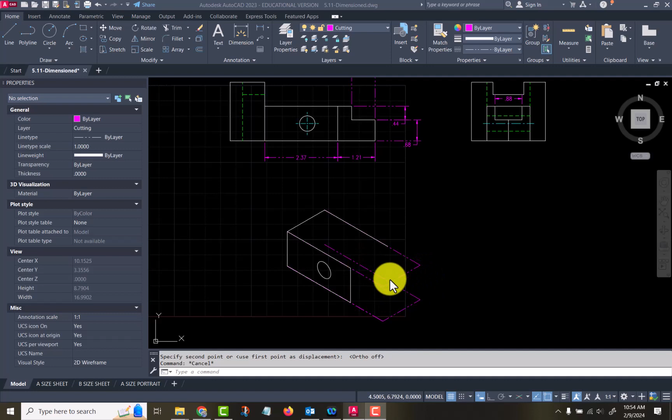And so what I've got drawn here is just the end of the safety key. I've got my construction lines here. I've put them on a different layer, made them purple, to make them easier for you to see on the video. But I've got the length of it and the width of it and the height drawn out here. And because this thing has a pointed end, and we know it's in the center because we could look at it here and measure here.

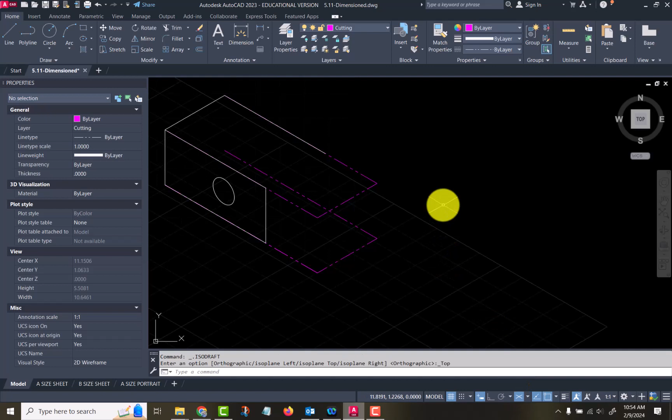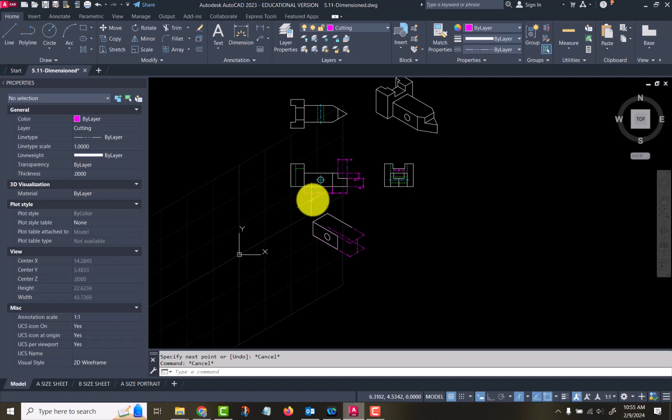So what I want is a center on the end point here that I want to draw. So let me get back into isometric mode. Rotate my axes. There we go. And I'm going to draw a line center, and I'm going to come up to center. Okay, now I know the location of this line here because I can measure it in this view, so it's 2.37. And if I were to use my aligned dimension tool, okay. Now, you could take this line and copy it down 2.37 to give you that location.

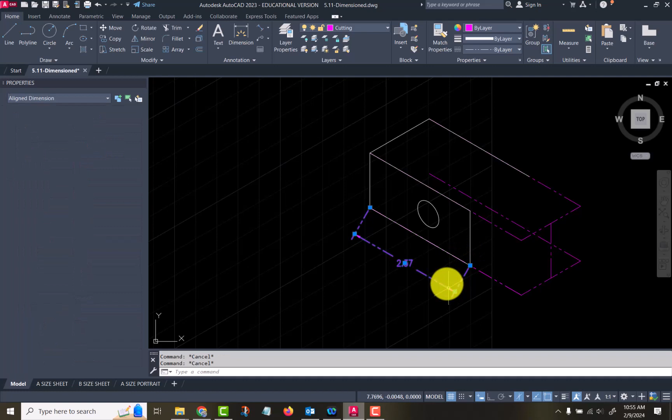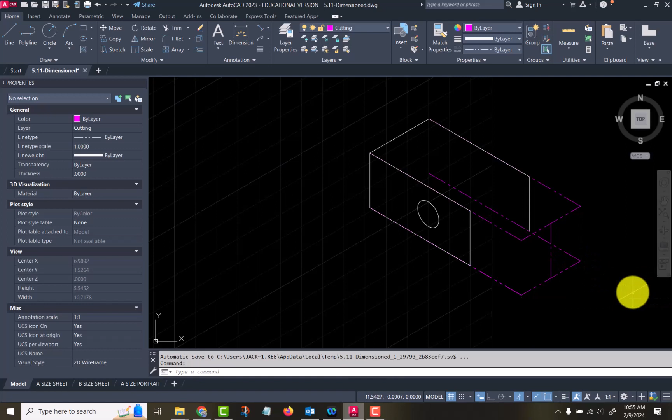Okay, now I can draw this bottom across. I need to know where it goes on the back side there, so let's just copy it over to the back. And so I'll select my line, and I can use this as a base point and go over to there. So that gives me the rear of the object. And I know it's there, okay. Let's see, I don't think I can see the back going across. I could at the top, so I will need it there. So let's go ahead and draw the rear of it at the bottom.

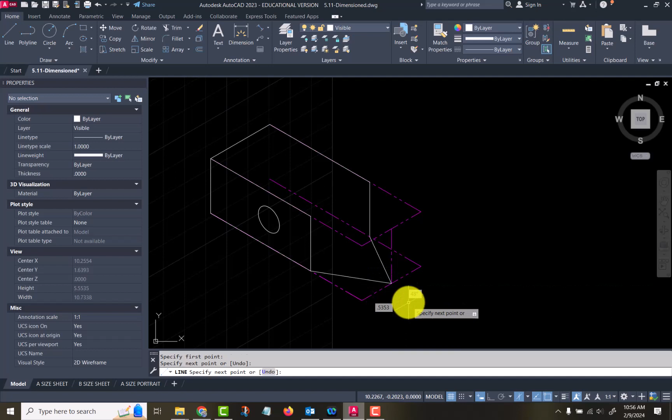So we'll go line again. And you'll notice that I do not have my ortho mode turned on down here because it's not snapping to the 30, 60, the 60-degree angles. Okay, so I've got those two. So let's take these two and copy them up to the top surface. Okay. So that's got the front edge of the thing there.

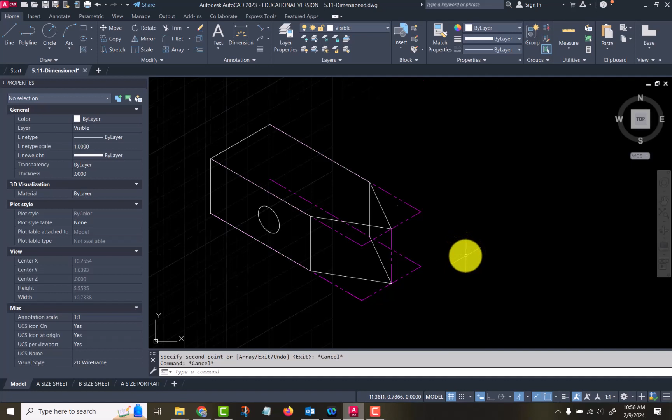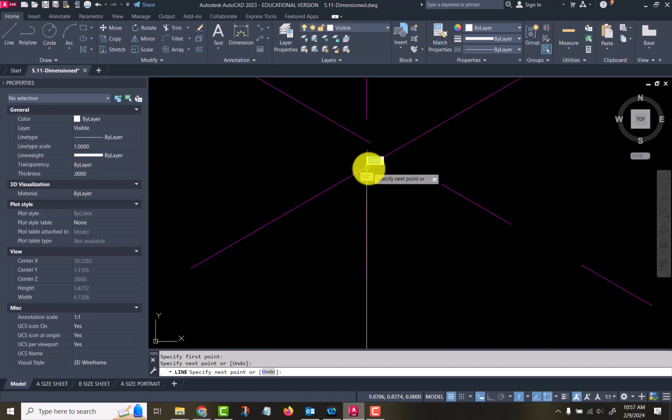Now, I need to know how far back this notch is and how high up it is. So it's 0.68 up. So let's take this line right here and copy it up 0.68. And I'm going to use that as my base point. And I'm going to come up until I get a snap, and I'm going to type in 0.68 on the keyboard. Okay, so that is coming up. You got to watch your object snaps on these, okay? It gets a little confusing. All right, so that's got the front edge of it there.

Now I know that it is 0.76 back. So I'll select that line and I'm going to copy it. I want to come down here for a base point and come back and get a snap going back the right line. And I'm going to tell it 0.76 on the keyboard. Now then, this is confusing. Yeah, I know. But that's how far back it goes, and then it goes up. Now I need to know how wide that thing is. I don't need this line anymore, so I'm going to delete that one to get it out of the way.

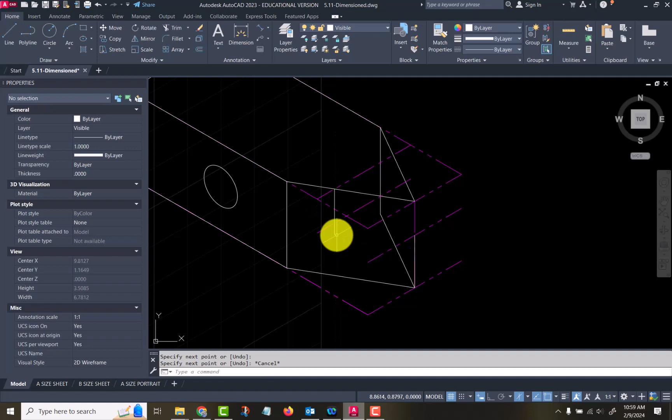And let's see. I don't know if I should copy. Okay, we need the top one here. So that was 0.76 back. So let's copy this one. Get a snap and go 0.76. Okay, so where this crosses the top line, that's where the initial cut comes down. So now I can draw a line from here at that intersection, and I'm going to just draw straight down. I'm going to draw it a little bit long. Okay, and then I can copy that over to the other side, or I could draw it again, either one.

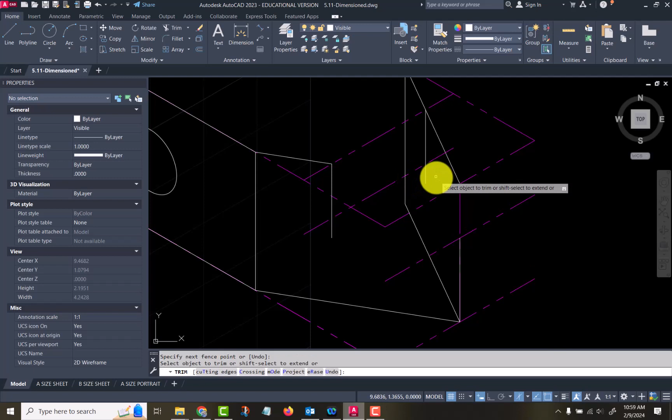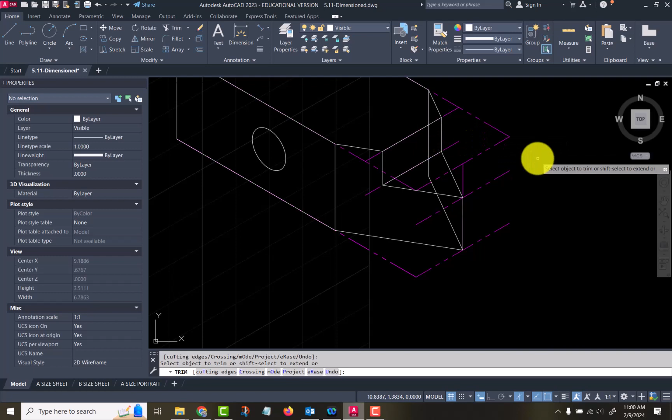Okay, now let's trim out the top just to kind of clean up that stuff a little bit. Now I know that there's a line across both of those, so let's draw those lines. All right, and I can trim those. And now my obliquing lines are going to be parallel to these, to this one and this one here in the back. So I could copy if I wanted to extend some lines down or up. Yeah, let's copy these. I could draw them or copy, either way. And then we trim those things up, and I can take these out because I don't need them back there anymore.

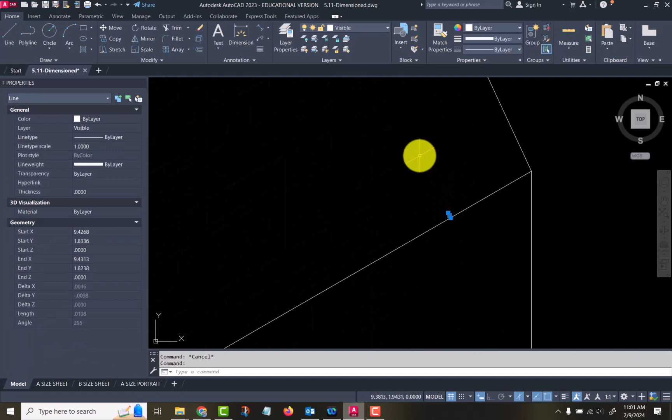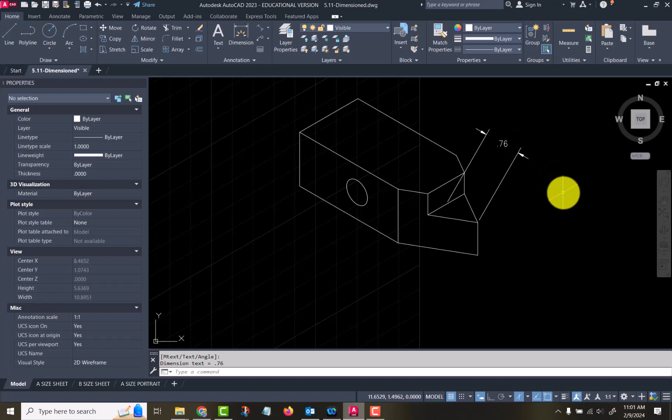All right. And now if I turn off those construction lines that I had drawn, there you go. I got a little bitty line right there. Okay, and so that's how the end of it looks. Now, if you want to check your measurements, use your dim aligned, okay? Let's go from here to the midpoint. So that's 0.76 deep, and you could certainly measure the height of it, but we know that those are correct. So that's how you deal with that, okay?